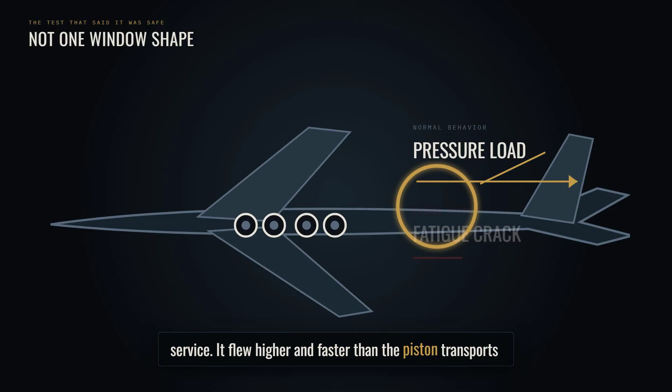The aircraft was the first jet airliner in scheduled passenger service. It flew higher and faster than the piston transports it replaced, inside a cabin pressurized more heavily than common civil practice. The loss raised an immediate question about engines, fuel, controls, weather, and structure. The answer later became famous as a story about square windows. That shorthand misses the opening where the failure was actually found and the test assumption that allowed it to develop.

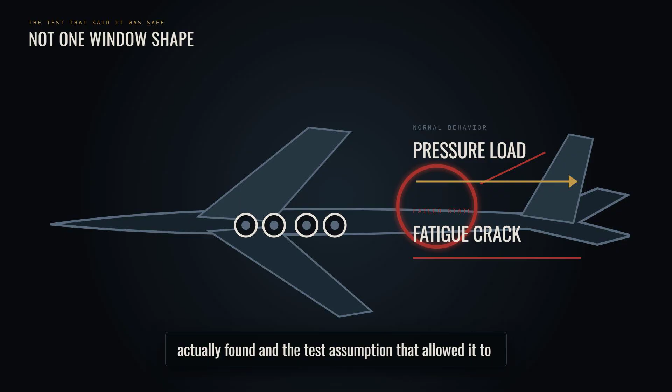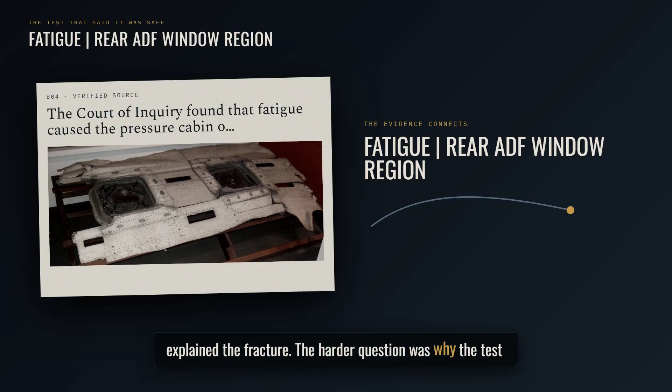The Court of Inquiry found that fatigue caused the pressure cabin of G-ALYP to fail in the region of a rear aerial window on top of the fuselage. It judged one countersunk bolt hole the most probable local origin, while leaving the exact first point unresolved. Repeated pressure, concentrated stress, and local construction details explained the fracture. The harder question was why the test program had not exposed that weakness before passengers entered service.

How could an aircraft exceed the accepted strength requirements, survive an apparently punishing test, and still fail in ordinary airline service? Solving that required a second disaster, a full airliner submerged inside a water tank, and enough wreckage raised from the Mediterranean to rebuild the first few milliseconds of breakup. The investigation would change how a new aircraft proves that its cabin can survive a lifetime.

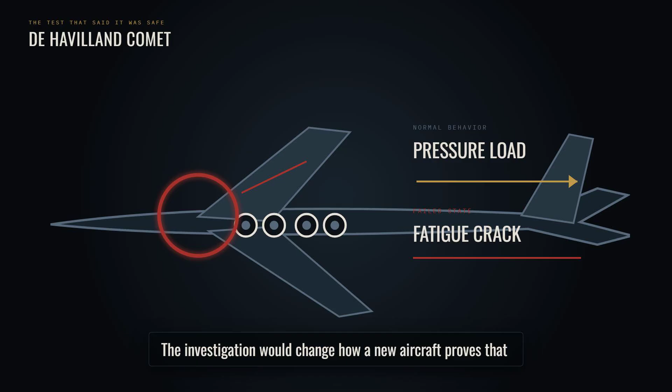De Havilland began the Comet project in 1946, before any prototype had flown and before civil aviation had much experience with a large jet pressure cabin. The first prototype took off in July 1949. Scheduled BOAC service began in May 1952.

4 jet engines were buried in the wing roots, leaving a clean silhouette and a cabin quieter than the piston transports passengers knew. Routes that had required a sequence of slower legs could be flown at greater speed above much of the weather. The Comet made the future of airline travel physically convincing before the structure had accumulated enough years to reveal its fatigue behavior.

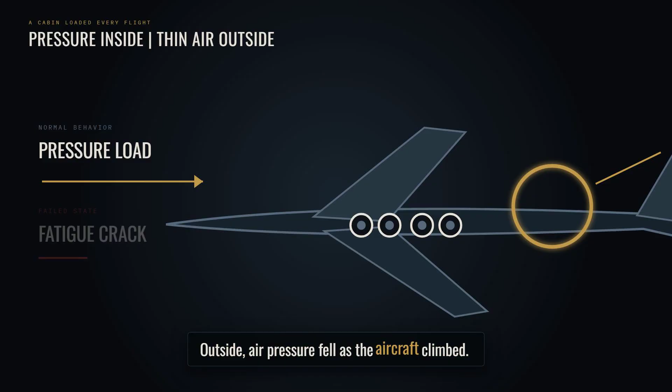High altitude created the Comet's advantage and its structural demand. Outside, air pressure fell as the aircraft climbed. Inside, the cabin remained dense enough for passengers to breathe comfortably. The shell had to contain that difference across its skin, frames, joints, doors, windows, aerial openings, and every fastener connecting them. The Comet's normal differential pressure was about 8.25 pounds per square inch, roughly 50% higher than values generally used.

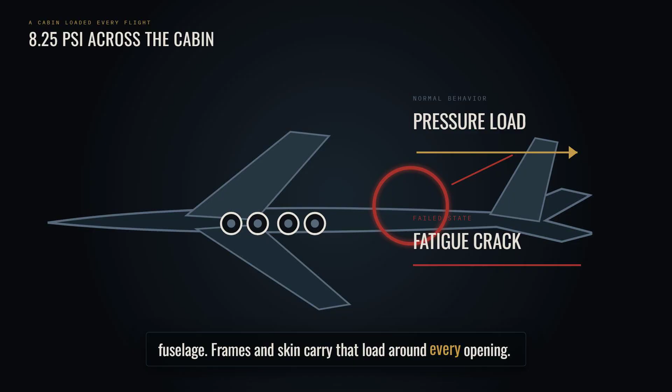8 pounds sounds small when applied to 1 inch. Across thousands of square inches, it becomes a large force trying to expand the entire fuselage. Frames and skin carry that load around every opening. The load also repeated. On every climb, the pressure difference rose. On descent, it returned towards zero.

A shell can survive one large load and still accumulate damage under thousands of smaller cycles. Microscopic slip at a highly stressed detail can form a crack. Each later cycle opens the crack slightly farther until the remaining material can no longer carry the cabin load.

Fatigue was not unknown in 1954. Aircraft designers already considered repeated wing and engine loads. The difficult part was predicting the life of a new pressure cabin with few years of service evidence. Requirements emphasized static strength and proof pressure. Repeated load rules for cabins were still developing after the Comet design was largely complete.

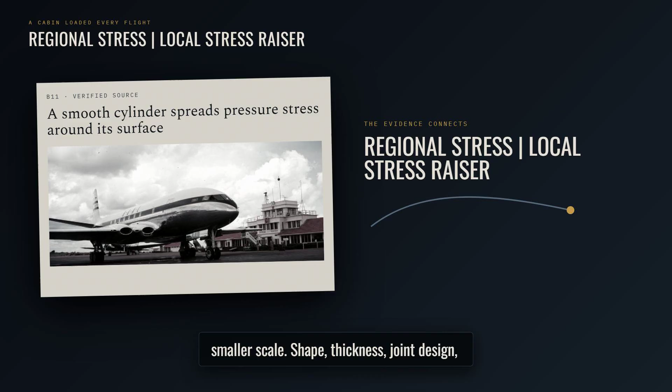A smooth cylinder spreads pressure stress around its surface. A door or window interrupts that path. The load has to flow around the opening, which raises stress near corners and edges. A fastener hole can raise it again at a much smaller scale. Shape, thickness, joint design, countersinking, and workmanship all influence where that local peak appears.

This is where the square window story becomes misleading. G-ALYP's first cabin fracture was traced to the region of a rear ADF aerial window on the roof, not to an ordinary passenger window.

The court treated high stress around cutouts and sharper stress at local construction details as the fundamental problem. The visible outline was one part of a layered structure.

Before the aircraft entered service, de Havilland exceeded the one-time static requirement. The cabin was designed for 2.5 times working pressure and tested to twice working pressure. Surviving that load showed that the structure could contain a large pressure once, but it did not determine how a production cabin would respond after many ordinary flights.

The repeated load evidence appeared stronger. The specimen represented the forward portion of the pressure cabin rather than a complete aircraft. Engineers closed its cut ends with heavy test bulkheads, applied high-proof pressures, and later cycled it at normal working pressure. By September 1953, it had accumulated about 18,000 applications of P in total, including roughly 16,000 in the later program, plus earlier loads above working pressure.

The structure in the rig looked like a piece of a Comet, and it had survived an amount of cycling that seemed to place normal airline service far inside a safe life.

G-ALYP left Rome at 9:31 on the morning of January 10th. The route carried it northwest toward Britain with 29 passengers and 6 crew. At 9:50, the crew reported over Orbetello Beacon. The flight was near 27,000 feet.

Climbing and weather, the inquiry later found, had not contributed to the loss. The last communication belonged to an ordinary handoff between stations. Nothing in the record described a warning, an emergency checklist, or a prolonged struggle before the transmission stopped. The final message ended in the middle of normal communication.

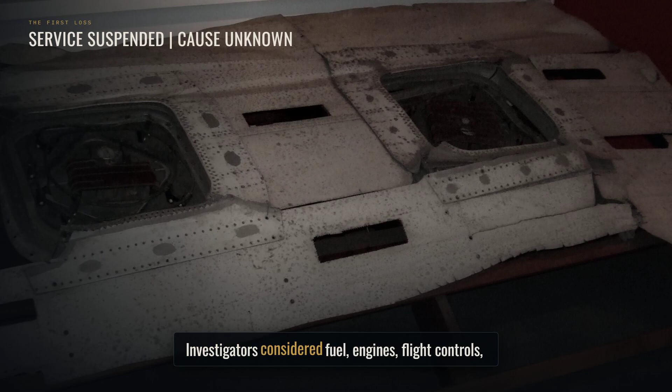Investigators considered fuel, engines, flight controls, turbulence, structural overload, and explosive decompression. A fuel system correction would not repair a pressure shell, and a structural modification would not solve a control failure. Each theory pointed toward a different fleet response.

The Mediterranean made recovery slow and selective. Search teams mapped where wreckage had fallen and raised pieces that could be located. Early evidence was incomplete. The aircraft had broken into many sections, and damage from the breakup, sea impact, and recovery could be confused with damage that began the accident. Investigators needed to determine which structure failed first.

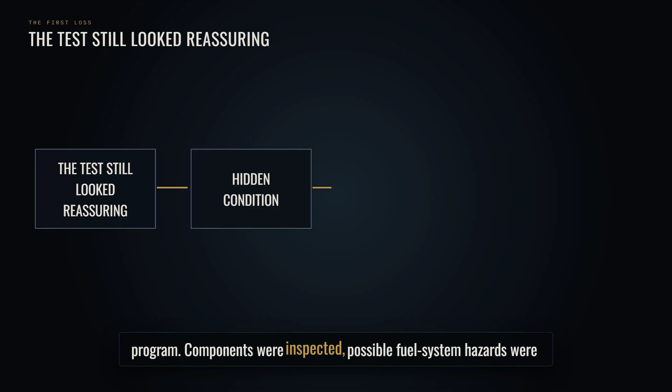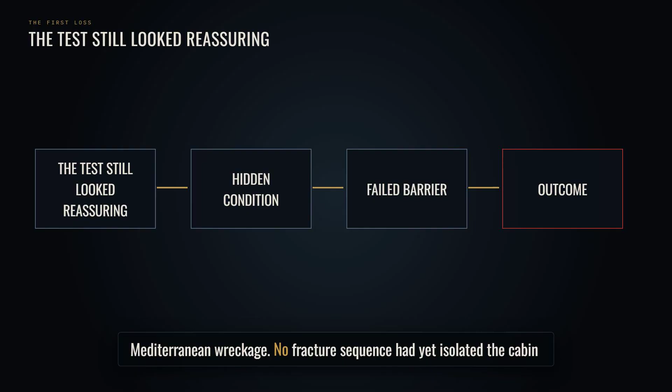The first investigation produced a broad modification program. Components were inspected, possible fuel system hazards were examined, and suspected control and engine problems received attention. De Havilland, BOAC, the Air Registration Board, and government advisors were working from an incomplete field of Mediterranean wreckage. No fracture sequence had yet isolated the cabin as the first structure to fail.

Against that uncertainty stood a concrete laboratory result. A cabin section had endured thousands more pressure applications than any service Comet. The result did not prove that fatigue was impossible, but it made fatigue a less persuasive explanation than it would become after Naples.

Officials had to decide whether the inspected and modified fleet could return while the Elba cause remained open. Continuing the suspension carried consequences for BOAC, de Havilland, passengers, and Britain's jet program, but the record does not support a story of officials knowingly accepting a fatigue defect. Their modifications addressed the mechanisms then considered plausible, and the existing cabin tests still suggested substantial life.

After technical advice and ministerial consideration, passenger service resumed on March 23rd. The decision was an attempt to manage uncertainty, not a declaration that Elba had been solved.

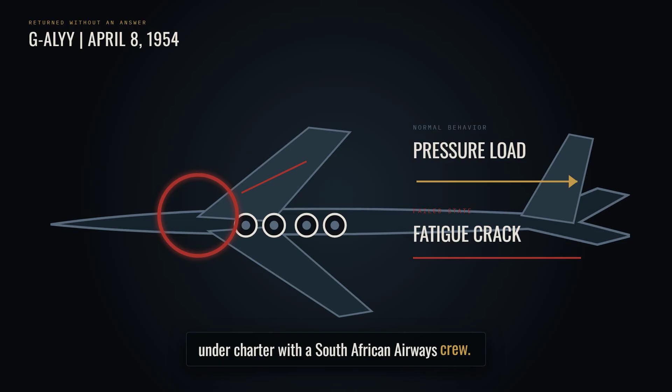On April 8th, 16 days after service resumed, G-ALYY left Rome for Cairo. BOAC owned the aircraft, and South African Airways operated it under charter with a South African Airways crew. Near the top of its climb, around 35,000 feet, it was lost near Naples. 14 passengers and 7 crew members died.

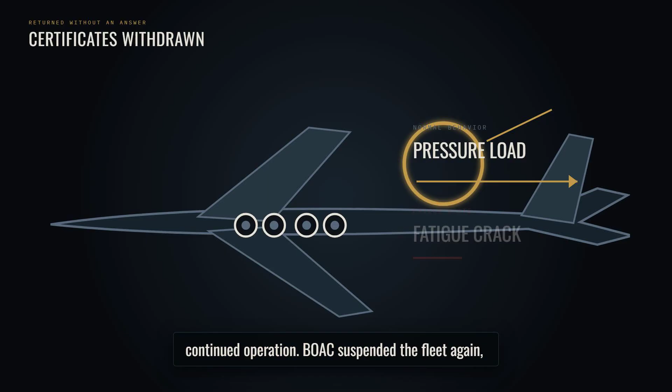A small inspection panel issue found before departure had been corrected, and the inquiry found it did not contribute. The second loss changed the standard of proof required for continued operation. BOAC suspended the fleet again, and on April 12th, the type's certificates of airworthiness were withdrawn. Two aircraft had now disappeared near the top of climb within three months.

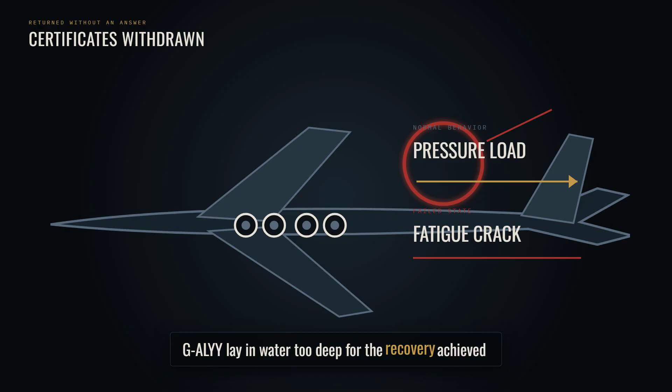That resemblance was strong enough to end passenger service, but resemblance alone could not establish one technical cause. The available evidence was unequal. G-ALYY lay in water too deep for the recovery achieved off Elba, leaving the second accident with a similar outline and far less physical detail.

That difference would remain important even after the inquiry. Enough of G-ALYP was recovered to support a positive fatigue finding. Too little of G-ALYY came back for investigators to prove the same fracture or an exact origin. The court would say only that the Elba explanation appeared applicable to Naples.

A third earlier Comet loss also had to remain separate. G-ALYV broke up near Calcutta in May 1953 after entering a severe thundersquall. The Indian inquiry attributed that accident to structural overstress from severe gusts or pilot overcontrol and loss of control. The 1955 court found no sufficient reason to overturn it. Similar wreckage did not automatically mean an identical initiating cause.

After Naples, the Minister of Supply directed the Royal Aircraft Establishment at Farnborough to use its full resources. The program combined flight trials, structural tests, fatigue work, fuel system investigation, model drops, wreckage reconstruction, and repeated pressurization of a complete Comet. The inquiry would not rely on one dramatic clue.

The central experiment used G-ALYU, an aircraft that had already completed 1,230 pressurized flights. Investigators would reproduce more flights on the ground, watching a complete production fuselage instead of a partial section. They also had to ensure that when it failed, the pressure release did not destroy the very crack they needed to examine. The RAE placed G-ALYU in a large tank and filled the cabin and surrounding space with water.

The test kept the complete fuselage, doors, windows, aerial openings, frames, and joints in their production relationship. Water stores far less destructive energy than compressed air at the same pressure. If the shell opened, pressure would fall without the blast that could tear neighboring evidence into secondary damage. Engineers could stop the pumps, drain the tank, and approach the fracture with its earliest region still physically connected to the rest of the aircraft.

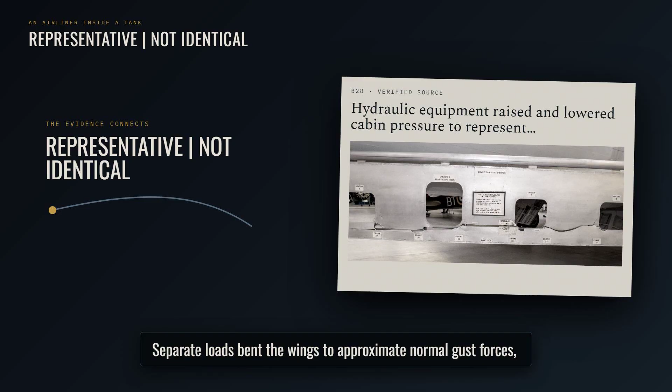Hydraulic equipment raised and lowered cabin pressure to represent one climb and descent after another. Separate loads bent the wings to approximate normal gust forces, so the pressure shell did not sit inside a completely rigid laboratory pose. Operators watched for leaks and structural changes as the cycles accumulated. The process could reproduce thousands of flights in months, but not every part of service. Engine vibration, airflow, jet efflux, and the changing loads of takeoff and landing were absent or simplified. The court later warned that those omissions would tend to make laboratory life longer than service life.

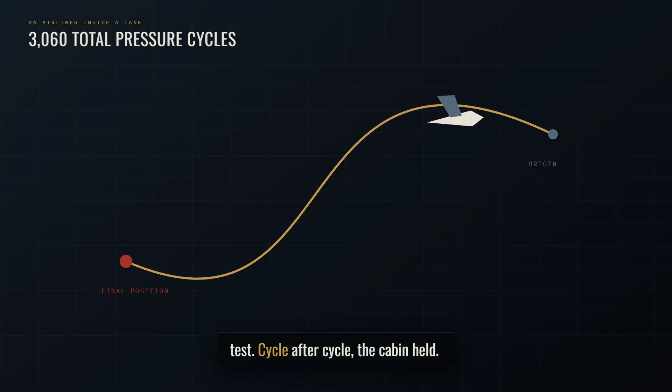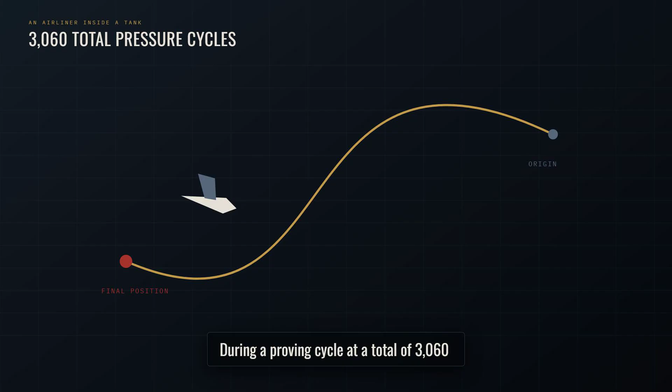At about every 1,000 simulated flights, the pressure rose above normal working level for a proving test. Cycle after cycle, the cabin held. The aircraft had arrived with 1,230 service pressurizations and survived another 1,830 in the tank. During a proving cycle at a total of 3,060 pressurizations, water began escaping through a rupture at the forward escape hatch. Examination showed fatigue had existed for several cycles before the final spread. The shell had been carrying a growing crack while still completing the earlier pressure cycles.

It opened at a forward escape hatch. G-ALYP's evidence would point toward a rear ADF opening. Both were cutouts in the same basic pressure shell, where load had to flow around corners and through rows of fasteners. The tank result gave investigators a working fracture sequence and showed that several openings could carry severe local stress.

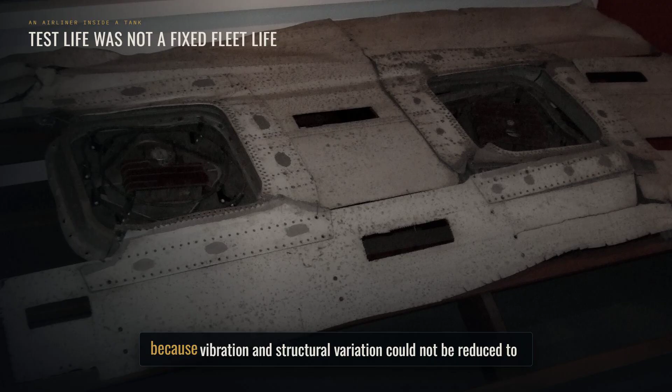Elba still needed its own physical origin, recovered from its own wreckage. Investigators estimated that the omitted service loads tended to make the tank test less severe than flight. One expert suggested the 3,060 combined cycles might correspond to roughly 2,500 service cycles. The court did not turn that estimate into a precise conversion because vibration and structural variation could not be reduced to one dependable factor. Even without a conversion, the contrast was unmistakable.

A complete production cabin failed in a range that overlapped the service histories of the lost aircraft far earlier than the partial section result had led engineers to expect.

The G-ALYP break redirected the Elba search. Investigators now knew what fatigue damage could look like after a pressure shell opened. Model drop tests helped predict where pieces from different breakup sequences would fall. Salvage teams returned to the mapped field and searched for roof structure that could test the new hypothesis. The failed cabin supplied a sequence rather than another cycle count. A local crack grew.

The pressure shell opened. Surrounding structure unloaded, tore, and struck adjacent parts as other sections followed. Each step left different marks, which could now be compared with metal recovered from the sea.

By the end of August, roughly 70% of G-ALYP by empty weight or structure had been recovered. The figure included about 80% of the power plant and only part of the cabin and equipment. Large gaps remained. Engineers laid the available sections into their approximate positions and treated every torn edge as part of

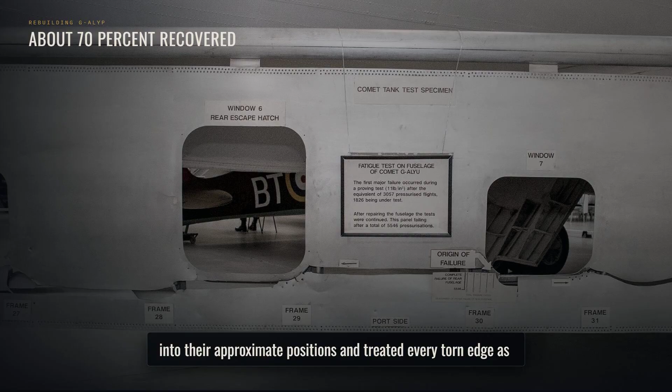a sequence. A fracture caused by internal pressure should leave different deformation from a piece torn away after the cabin had already opened. Paint transferred between parts could show which surfaces struck during breakup. Distribution at sea could show which pieces separated early enough to drift or fall along a different path. The distribution and structural marks showed that the pressure cabin failed first near the front spar region.

Model drops tested whether proposed sequences could reproduce where major pieces had fallen. Contact marks and paint transfers placed some components against others after the cabin began opening.

The evidence did not support an engine separation or an external mid-air collision as the initiating event. It described a cabin burst while the aircraft had been flying substantially normally, allowing the investigation to move from the whole airplane toward a particular part of the pressure shell. A roof skin section containing 2 ADF aerial windows became the decisive physical evidence.

The opening sat above the passenger cabin, where antenna equipment required breaks in the otherwise continuous shell. Investigators reconstructed fracture directions through the panel and found fatigue near a countersunk bolt hole at the starboard aft corner of the rear opening. That local damage, together with the wider breakup sequence, led the court to call the bolt hole area the most probable origin.

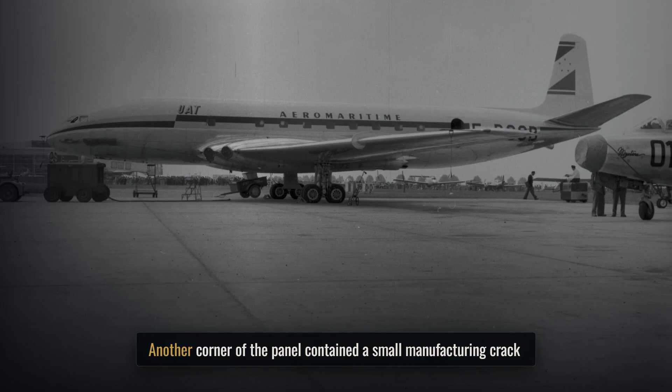It was physical evidence from G-ALYP, not a location borrowed from the water tank aircraft. Another corner of the panel contained a small manufacturing crack that had been stop drilled. Investigators examined it as a possible starting point and found no fatigue there. The countersunk bolt hole area carried the stronger evidence.

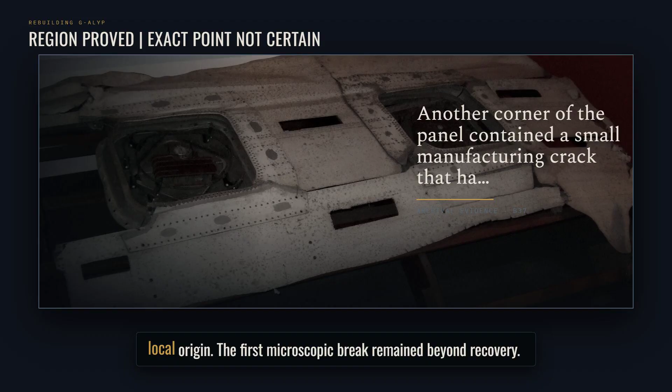From the surviving metal, the court could establish the rear ADF window region and name that hole as the most probable local origin. The first microscopic break remained beyond recovery. Strain gauge work on representative structure explained why an opening region was vulnerable.

At normal cabin differential, investigators extrapolated about 43,000 pounds per square inch at an edge. Adding other known loads brought the estimate to roughly 45,700, around 70% of the material's ultimate strength. These were test-derived estimates of local stress, not readings taken from the recovered G-ALYP panel.

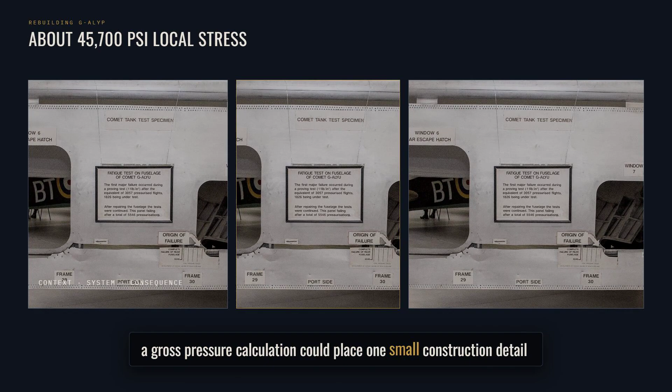They showed why a shell that looked comfortably strong in a gross pressure calculation could place one small construction detail under a severe repeated load. A stress below ultimate strength can still be dangerous when it repeats.

Once a fatigue crack starts, its tip concentrates stress in the remaining material. Growth may be slow for many cycles, then accelerate as the crack lengthens and the intact section becomes smaller. The final cabin opening can be sudden, even though the damage developed over months.

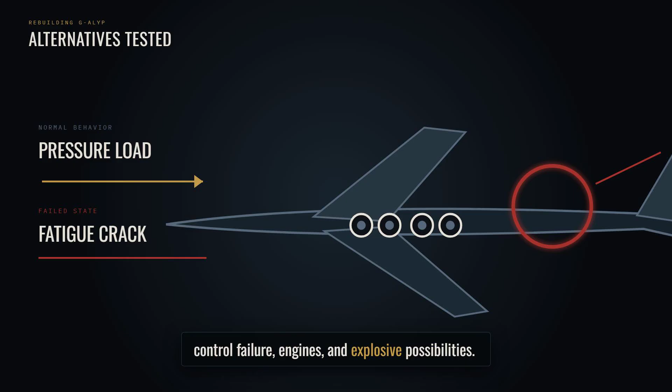The inquiry tested other explanations. Weather did not account for the Elba loss. Investigators examined fuel venting, refueling damage, control failure, engines, and explosive possibilities. Some issues still deserved correction, but the alternatives did not fit the complete pattern as well as pressure cabin fatigue.

The court found that fatigue caused G-ALYP's pressure cabin to fail in the rear ADF window region. That finding belonged to Elba and to the roof structure recovered there. It directed the engineering response toward pressure cycles, cutouts, fastener details, and local stress instead of the broad set of theories considered after the first loss.

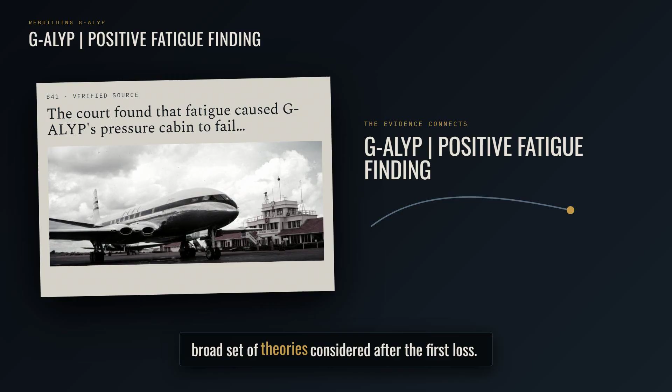The new evidence returned investigators to the old partial cabin test. Before its long fatigue program, that specimen had received 2 applications at twice working pressure and nearly 20 more between working pressure and that maximum.

A production aircraft also received a proving test around 133 percent, but it did not enter service with the same 2p preload history. The distinction was local and physical. Metal around these specimens' highest stress concentrations had already been driven beyond purely elastic behavior before the cycle counter used to demonstrate fatigue life began.

Under an ordinary elastic load, metal returns close to its original shape when pressure is released. A sufficiently high local load can leave a small permanent deformation. That change redistributes part of the next load into nearby material and reduces the peak at the original hotspot.

The specimen could therefore survive later working pressure cycles more easily at a detail that had yielded during the earlier proof tests. The proof loading had not made the whole structure universally stronger.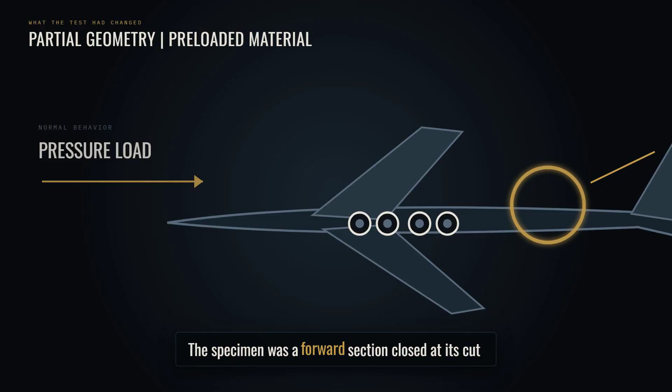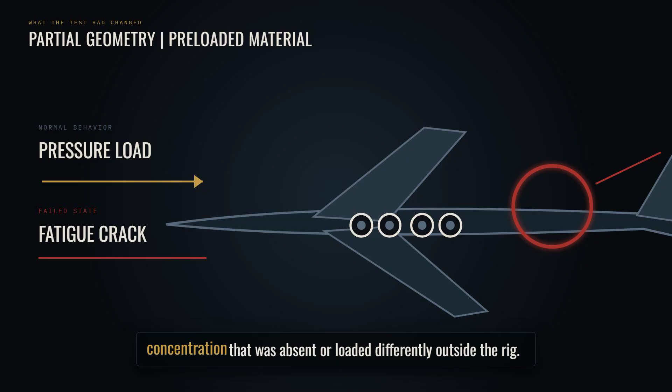It had altered the exact local stress pattern the fatigue program was meant to measure. Loading history was only half the mismatch. The specimen was a forward section closed at its cut ends by stiff bulkheads. Those boundaries affected how pressure load traveled through the skin and frames. The rig did not include every opening, joint, and transition found along a complete production cabin, including the rear ADF region that later mattered on G-ALYP. A part of the structure could demonstrate the behavior of the details it contained.

It could not reveal a stress concentration that was absent or loaded differently outside the rig. Cap 127 called preload at least a partial explanation for the anomaly between more than 16,000 later working pressure applications on the specimen and roughly 3,000 combined cycles at G-ALYU's failure. It did not supply a correction factor that converted one number into the other.

Thickness varies, fastener holes and countersinks vary, joints carry load differently, and small manufacturing details change where a crack first forms. Two cabins built to the same drawing can therefore reach fatigue failure at materially different lives. One specimen could no longer define the life of a fleet.

The rig needed production geometry, a loading history that matched the aircraft, and enough margin for variation from one cabin to another. Static strength still had to be proved, but on a separate article from the one used to measure fatigue. The old section had produced a valid result for its own geometry and loading history. Airline service exposed everything that result left outside the rig.

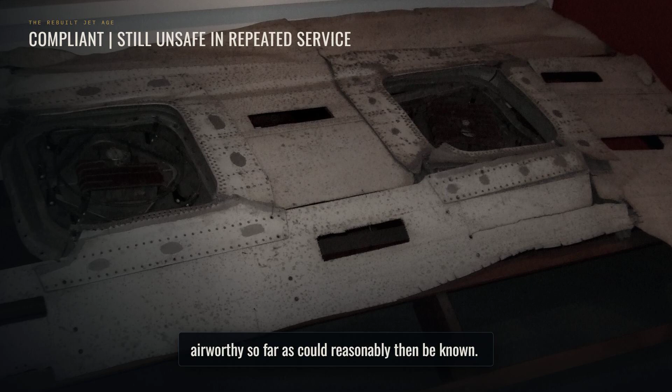The court found no wrongful act, default, or negligence by a party or employee. G-ALYP had been maintained to its approved schedule and was airworthy so far as could reasonably then be known. De Havilland's approach matched what the court regarded as good engineering practice at the time. Accepted practice had produced a cabin with hidden fatigue vulnerability, which made the method itself part of the safety problem.

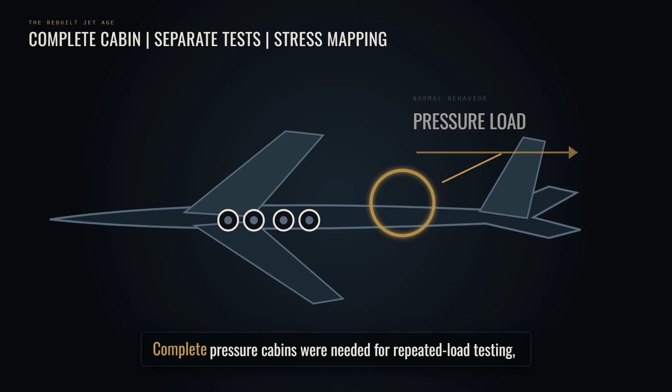The recommendations changed what future proof had to contain. Complete pressure cabins were needed for repeated load testing, while separate articles would often carry static strength work. Designers needed detailed calculations around cutouts, tests of representative joints and panels, and far wider use of strain gauges to map stress instead of inferring it from gross survival.

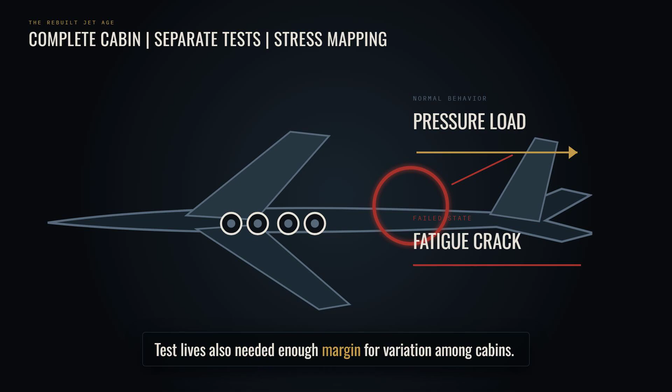Test lives also needed enough margin for variation among cabins. The objective was not to find one average failure point. It was to keep the weakest plausible production aircraft inside a safe operating life.

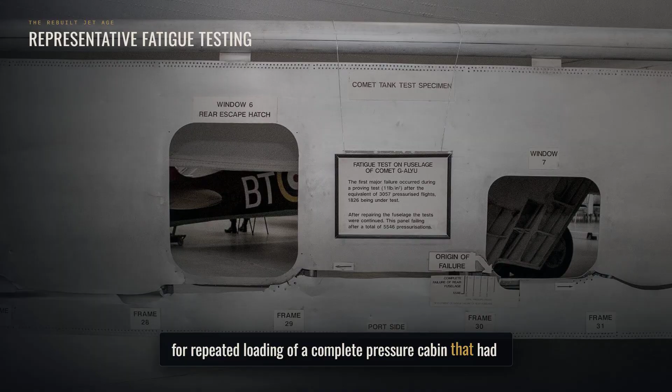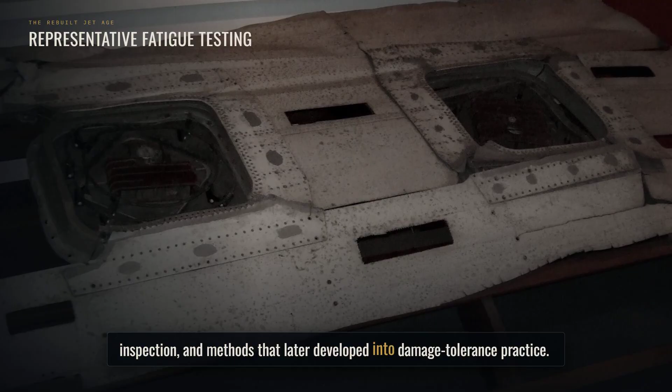Revised British requirements in 1956 called for repeated loading of a complete pressure cabin that had not already been used for strength testing. That wording directly addressed both weaknesses exposed by the inquiry: incomplete geometry, and prior high loading. Research continued into crack growth, local fastener details, structural redundancy, inspection, and methods that later developed into damage tolerance practice. The changes took years and crossed many aircraft programs.

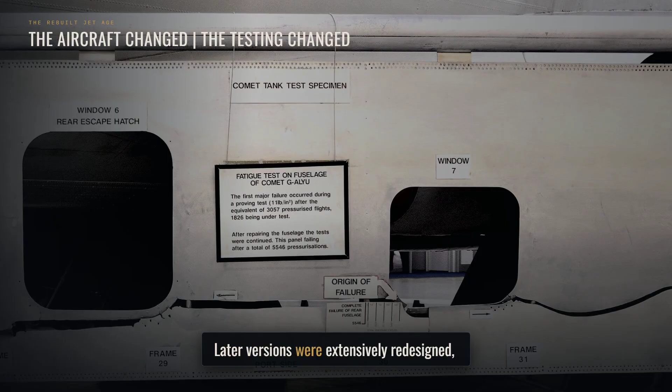Rounded openings became visually associated with the Comet lesson, but geometry alone was never the full certification response. The Comet itself did not vanish. Later versions were extensively redesigned with heavier structure, altered openings, and lower local stress. They returned to service in a market now moving quickly toward other jet airliners. The original Comet one could not return without modifications too extensive and costly for normal airline operation.

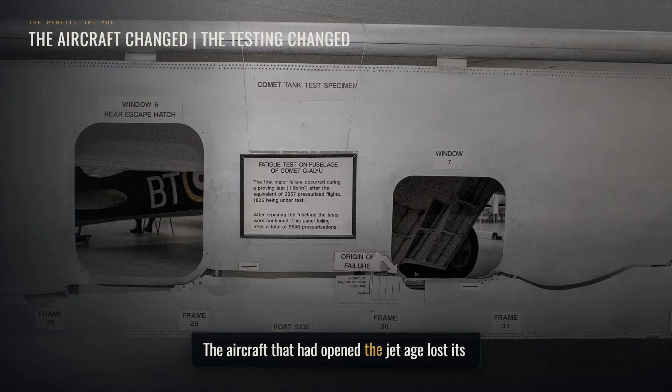The aircraft that had opened the jet age lost its commercial lead, but its investigation supplied physical evidence that every later pressure cabin program could use. The lesson traveled farther than the surviving fleet.

Elba supplied enough wreckage for a positive finding. Naples remained in deep water. The similar phase of flight and the evidence that could be recovered made the fatigue explanation appear applicable to G-ALYY, but the court gave no definite cause. The two losses could inform each other without pretending that missing metal had been examined.

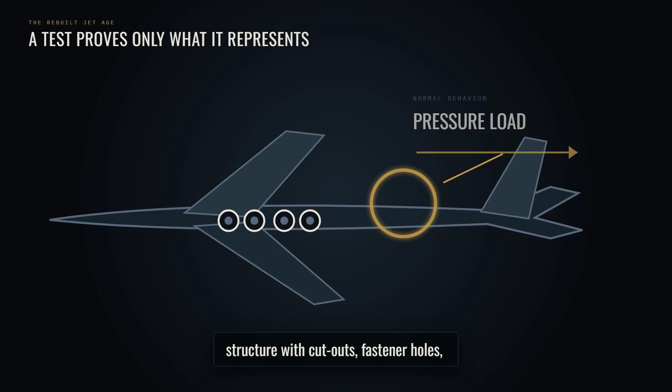The Comet pressure cabin brought high repeated loads into a structure with cutouts, fastener holes, and local stress peaks that varied from aircraft to aircraft. The old partial section survived 18,000 working pressure applications because its geometry and earlier loading made it a different object from the cabins in service. The number was accurate, the promise attached to it was too broad.

After Elba and Naples, a new airliner would have to prove the life of the complete cabin it intended to fly.